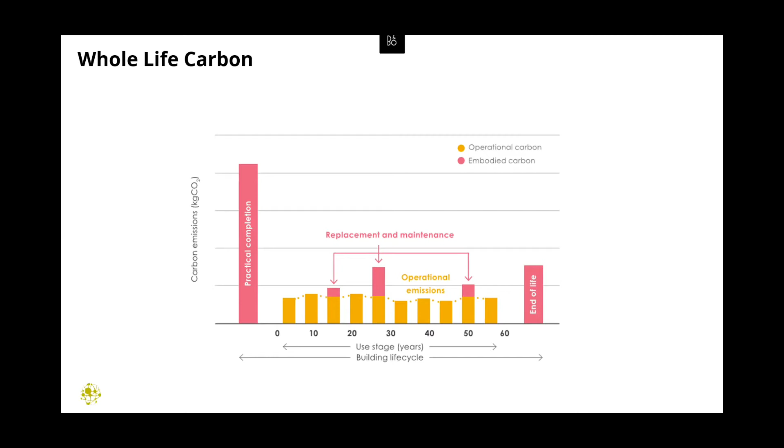So whole life cycle carbon, looking at the operational carbon, which is shown there in yellow. And the conversation about operational carbon is often very similar to the conversation about net zero energy. It's not quite the same, and I want to talk about some of the key differences today. But then also making sure that we're looking at embodied carbon that goes into it first for the initial construction of the building, and then your replacement and maintenance elements throughout the life cycle, and then the end of life cycle. So it's a much more holistic look than just the ZNE conversation, but there is certainly a lot of overlap between the two of those.

Now, one of the things that Climate Emergency Design Guide, I think, does quite impressively is take what is really a complex issue and distill it down to this, they call it their one-pager for zero carbon design. And it focuses on these 5 key areas, or at least identifies 5 key areas to really consider when you're taking a zero carbon approach to buildings. So the low energy focus, that's energy efficiency. That's where a lot of the conversation is pretty similar to ZNE, and really driving your efficiency and optimizing your building to reduce the energy usage.

Measurement and verification being identified as like a fundamental core item. So we've got to make sure that if we're going to design these buildings, that when we start them, they operate correctly. But then looking at it over the long term to make sure that you maintain that operation, right? So we need to design these buildings to operate at zero carbon on day one, but also make sure we're maintaining that over the whole lifespan of that building.

Embodied carbon was what we had talked about before, as far as just the amount of carbon it takes to maintain or manufacture all of those items. The climate doesn't care if that carbon came from your boiler or if it came from a mining site. We need to be looking at carbon sort of at both ends. So that's sort of the building side carbon use, and then you start looking at the energy sources. So the building energy sources, it sounds like I don't need to convince this crowd to get fossil fuels out of buildings. So certainly leaning towards the building electrification as a necessary first step.

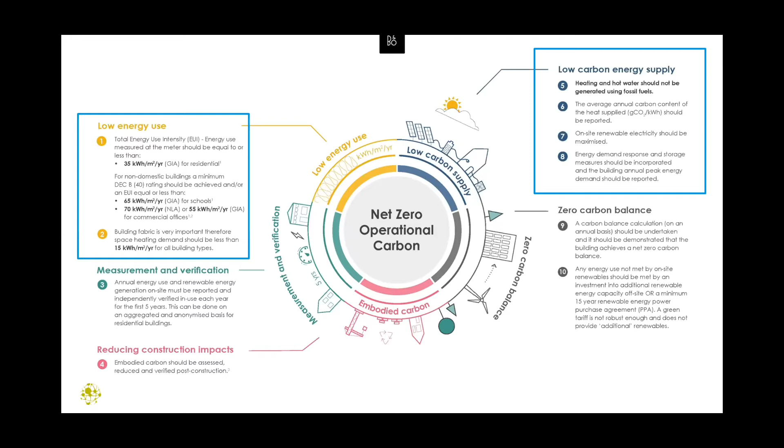So I'm really going to focus on some key elements of the energy use and that integration with the grid, and really focus on sort of some of the new elements that are different from the conversations we've been having in the past about ZNE, because I think all of those conversations are really important, but when we make the leap from zero net energy to zero carbon, there are some ways that we need to think differently. And the first really important item to drive home is the way we are setting targets and goals. And this is a change.

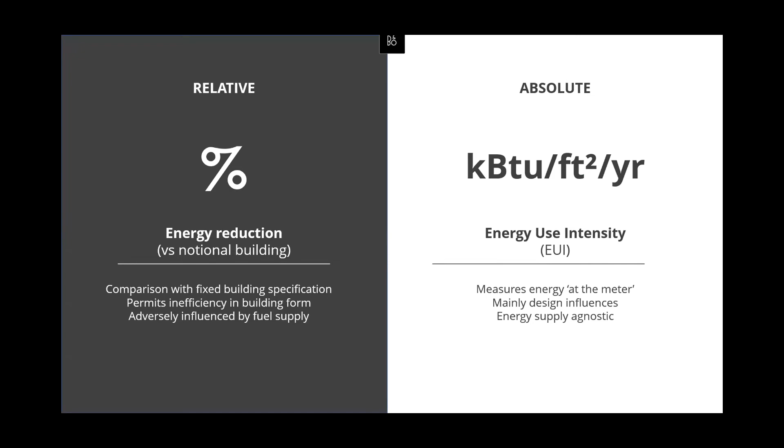When we first started designing for high performance buildings, we've been looking at relative energy metrics. So we're always designing to be 10% or 20% or 50% better than an equivalent baseline building. And what we need to do is shift that line of thinking to stop thinking relative and start thinking in absolute metrics. So actual energy use intensity per square foot per year. And that's going to be different for different building archetypes, but it needs to be a fixed number. And that's really important for 2 reasons. The first is just the way it drives design.

So one of the issues that we've always run into with a relative metric is that some of the really core elements of good design, so the building footprint, the orientation, the glazing percentage, in a relative baseline approach, you can design a great big tall glass skyscraper, and as long as your glass is sort of 10% better than the baseline, it's still going to show up as a high performance building or an efficient building in the model. And in reality, what we need to be doing is hitting fixed targets so that we do optimize the building envelope and we start optimizing the footprint and really getting benefit from that in the way we evaluate our metrics. So the first reason it's important to look at an absolute metric is the way it drives design and design decisions.

The second is looking at it from a more, if we want to be able to scale zero carbon designs and be able to address it at scale and grid level and city level and really transform our built environment, we need to start thinking of it as an energy budget.

So not an aspirational goal, but if we look at our grid and we look at how much electricity we have available for our buildings and start dividing that by the built environment, then we can come up with a budget of electricity we have available per square foot. And stop treating that as a goal and start just thinking of it as a firm budget that we now have to work within and use that to drive our design.

And that way we can start thinking about these buildings, because that's the only way we're going to be able to do zero carbon in cities and at scale, because in cities, we can't just do zero carbon buildings as those one-off sort of greenfield sites where we've got great big flat roofs that we can put our PV on. In order to take our city zero carbon, we do have to think of it at a grid level.

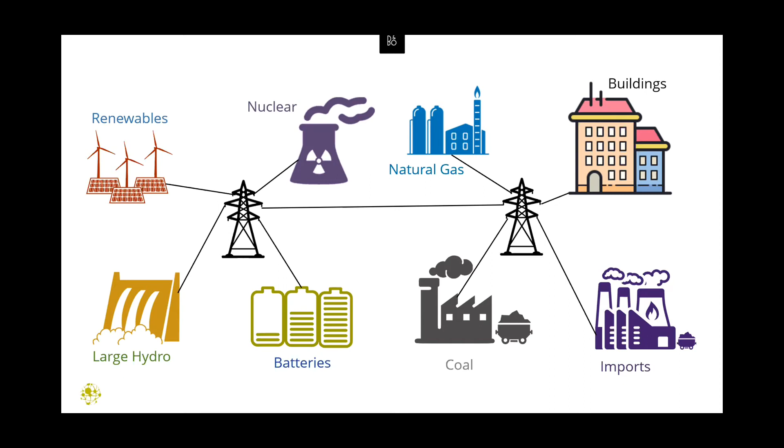So not all energy is the same from a carbon standpoint. And throughout the day, how much carbon is associated with that energy is going to vary. So this is one of those key areas where the zero carbon conversation is different from the zero net energy conversation. In zero net energy, we treat a kilowatt hour of electricity the same no matter what. And it's really not when we start looking at the carbon. So the time of use of that energy becomes really important.

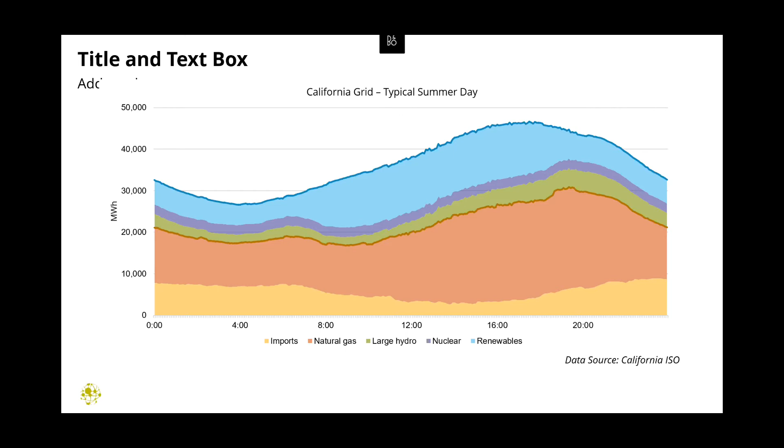And one of the ways to think about that is if we think about what our grid produces for electricity, it's going to be a mix of renewables, and we've still got some of those fossil fuels on there. But the base load fossil fuel plants, those power plants are fine-tuned to their best efficiency point. So we're still producing emissions, but these are the ones that are humming along, dialed in at how they can produce that with the fewest emissions possible.

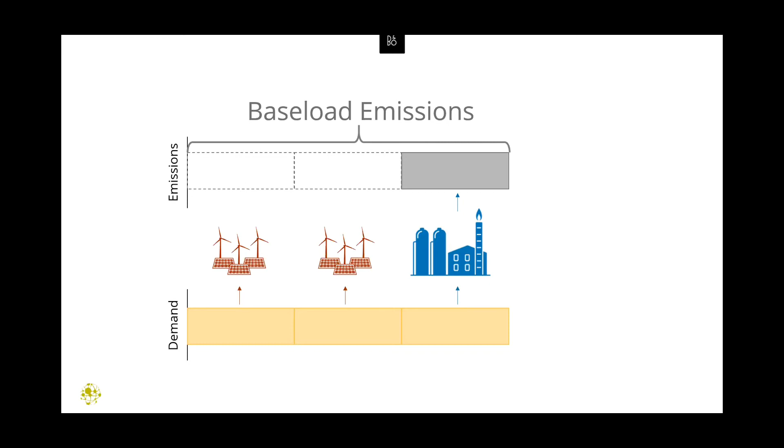As soon as we need to start changing that to meet fluctuating demand, that's essentially what happens when you first start a car, or if you watch a car accelerate up the highway and you see these big bursts of smoke coming out the back. When you have a combustion process and it needs to deal with adapting and starting and revving up, that's where you start getting a lot more emissions. So if we have to adjust our grid to these big swinging peaks in demand, the difference that we get in emissions is considerably more.

And so there's a talk about marginal emissions, that not every kilowatt hour is linearly related to the amount of carbon that comes out of that. So to reduce carbon emissions, it's not just a matter of reducing the amount of energy you use, it's leveling off the way you use it.

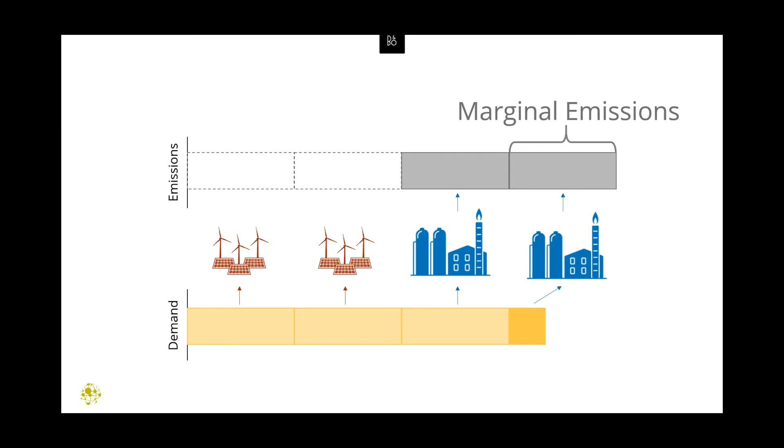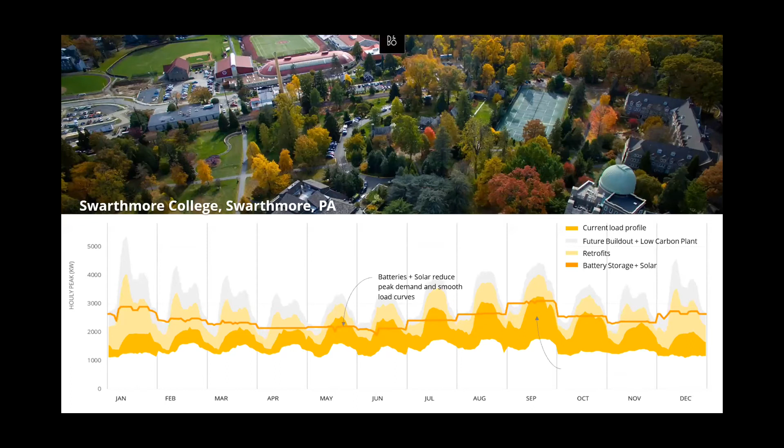Oh, sorry. So if you want to hear more about that or go into some of those studies in more detail, again, this is a reference I'm happy to share with you. We have another presentation on that that goes into it in a bit more detail.

But essentially, it sounds like I don't need to convince this crowd about building electrification. Certainly listening to the presentation that I just heard before, getting fossil fuels out of our buildings and off of our grid is going to be a necessary step. To do that, we need to optimize the efficiency in our buildings first through a lot of the really sustainable, high performance design approaches we've been taking getting to this point.

The difference that we need to make now to get to zero carbon with that building electrification is shifting to heat recovery and heat pumps, getting away from just really efficient boilers, and starting to think about grid integration. We don't want to think about our buildings as standalone islands, but really thinking about how they interact with that grid and being able to level off those peaks.

So incorporating demand response and energy storage into our designs, building in a demand response system that can monitor that grid so that you know how carbon intense your energy is at any point in time, so that when you're drawing a kilowatt hour of energy in the morning versus in the afternoon, your building can respond to that and can shift that so that it's at the lowest emission point. And when the grid is peaking, when they are having to bring on those peaker plants, having your building and your site be able to respond to that.

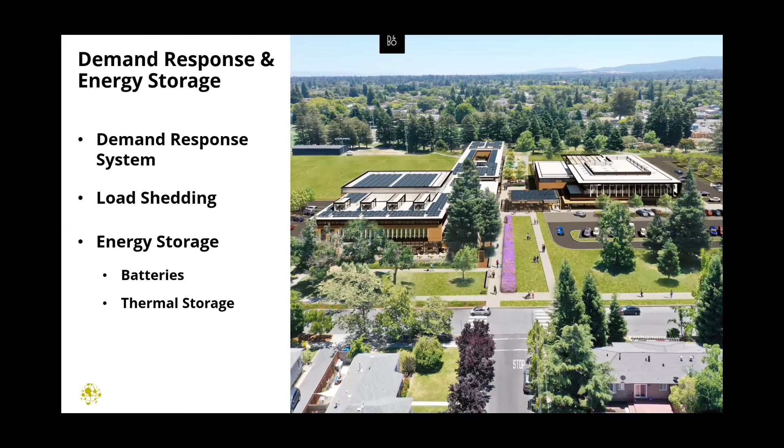Now that can be through load shedding. So that's resetting your thermostats up, shutting down unnecessary plug loads, turning down some lighting. So you can change the operations to shed that load, or you can have the on-site storage to be able to meet that load from your site instead of the grid. So that can be electrical storage and batteries. It can also be thermal storage to offset the loads from your HVAC system, both on the heating and the cooling side.

So I want to go through a couple of case studies. Again, for the sake of time, I won't necessarily have time to get into them in a lot of detail, but I think just highlighting some of the key elements that we did incorporate, and just a couple of lessons learned that we went through with them. So the first one is the J. Craig Venter Institute. This one's down in San Diego in my backyard.

This was the first ZNE designed lab in the world. So it is all electric. We designed it about 10 years ago now. I think it opened in 2013. And so this one does incorporate thermal storage. So we have big water tanks built in the parking garage. So when we're cooling the building all day, we dump the heat into the tanks. And then in the evening when we need heat, we pull that heat back out and we use it to heat the building.

It also incorporates its own PV array. One of the big lessons learned from here, and this sort of speaks a little bit to that absolute metric versus a relative metric in the modeling, is that the other thing that gets lost in a relative modeling approach is the plug loads. Because the plug loads get assumed to be the same in both your model building and your baseline building, there's not the same level of scrutiny that gets applied to them.

And so for this particular project, the plug loads that we thought we were designing around ended up being quite different from the actual operational loads after the fact. What I think we found was that a lot of the old freezers and equipment that they were using in their previous labs got moved over, so it wasn't as efficient as we were expecting. And there was just a lot more of it. This is a genomics lab, so they have lots of cryo freezers.

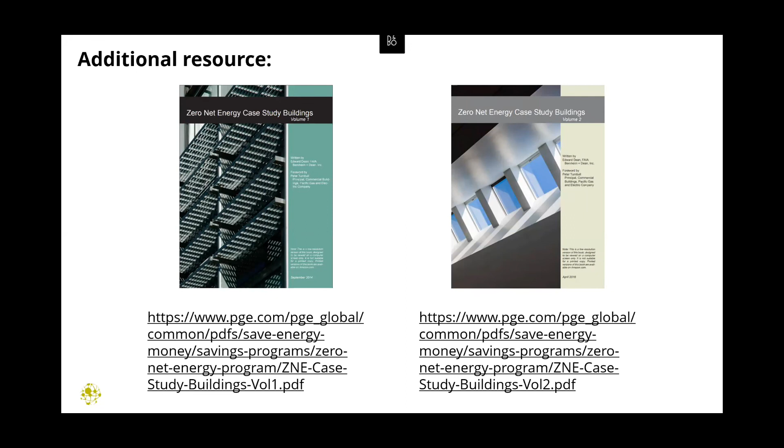I've only got a few minutes left, so just to wrap up the key points: when we're looking at this, zero carbon needs to be thought of differently from the way we've been approaching zero net energy. Really the focus on fixing an absolute EUI budget and treating it like a budget. It's not an aspirational goal. We need to start thinking about this as a fundamental driver and design criteria that we have to meet.

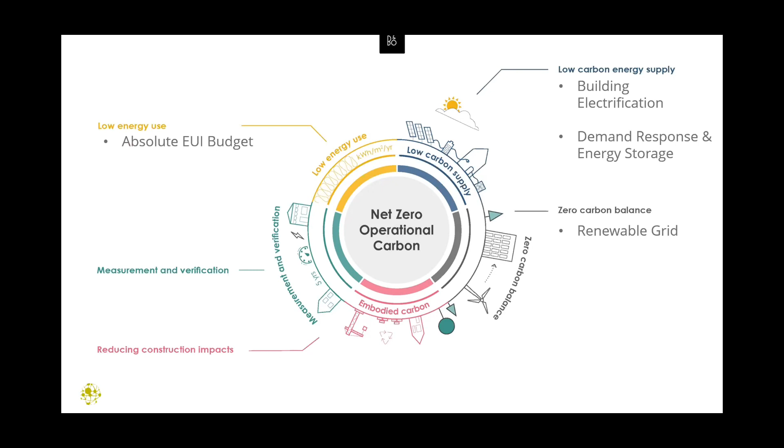Building electrification, getting our fossil fuels out of our buildings, and being able to integrate with that grid. We really need to be paying attention to the grid and the time of use of our energy, not just a net metering of in and out, and being able to adapt to a changing grid. So it does need to be responsive, because we know our grid is going to change. The time of use equation that we have now is going to change over time as that grid becomes more renewable, and we need our buildings to be able to adapt to that if we're really going to design resilient infrastructure for the future.

So that's zero carbon where we're at now. Like I said, we're always looking at what the next challenges are and how we're going to address those. So grid stability and integration: we talked about needing demand response at the building level. That needs to happen at the grid level as well, and those need to be able to interact and respond to each other. So really thinking bigger about how our buildings tie into our grid, and how we can respond to that.

Battery and energy storage technology really needs to develop. We really need batteries to balance out those peaks. But from an embodied carbon standpoint, batteries have their own challenges. A lot of our batteries are based on rare earth metals. They have a lot of embodied carbon in them themselves. A lot of our battery technology comes from smartphones, looking at super high energy density and lightweight technology. For stationary building batteries, we don't need that. So we can look at other lower carbon options and different technology, but making sure that we are looking at things from a life cycle and embodied carbon standpoint.

I think there's more awareness around embodied carbon of the building elements, but we're starting to do more research about embodied carbon of the MEP system specifically, and also looking at refrigerants. As we get off gas, we're going towards heat pump systems, which means we're putting a lot more refrigerants in buildings. Refrigerants themselves bring their own challenges from global warming potential. So that's going to be another next future that we have to look into and solve. We are currently looking into this in our office and doing research if you're interested in knowing more. We've got another presentation you can look at for that.